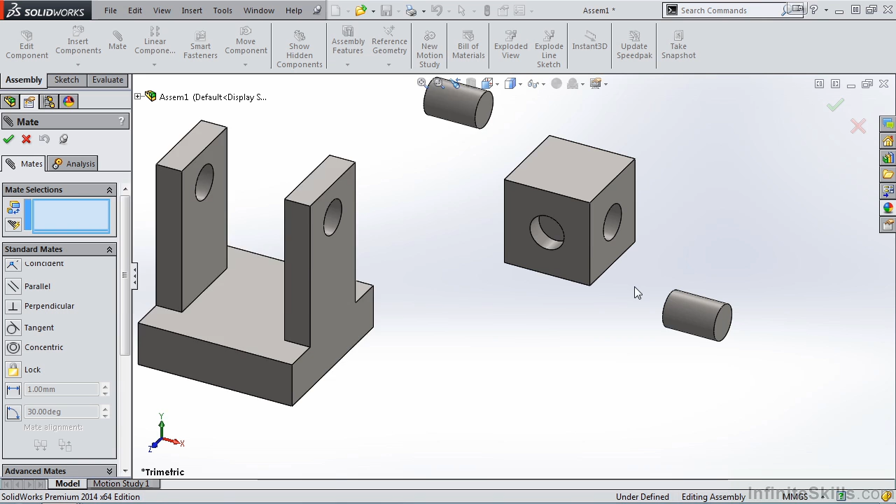Let's say, for example, we would like to mate this pin with this hole in the square block, and we want this face of the pin to be flush with the back face of the hole. So I'm going to select that back face, and notice it appears in the window for the Property Manager. I'll rotate the assembly and select this face. Once I select the two faces, notice in the Property Manager that the coincident mate is the one highlighted.

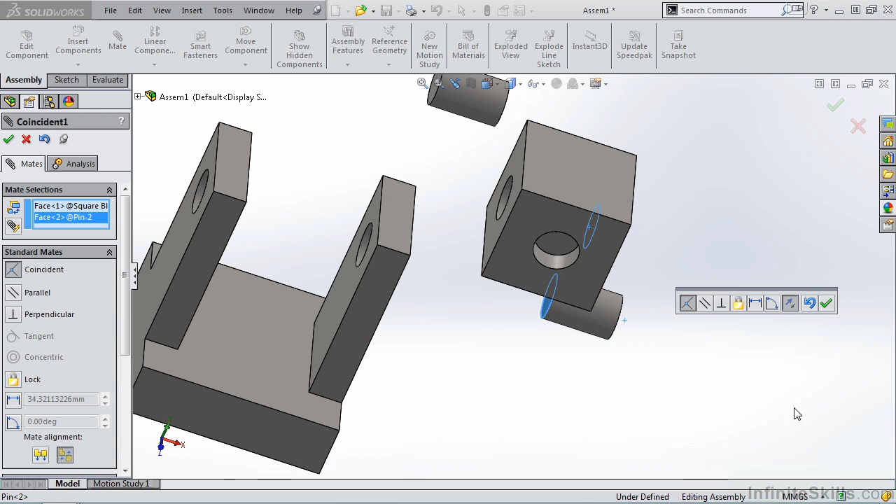Obviously I can select a different one, and I also have a pop-up toolbar, so you don't have to move your mouse all the way across the screen to make changes. I do like the coincident mate, so I'm going to select the green check mark.

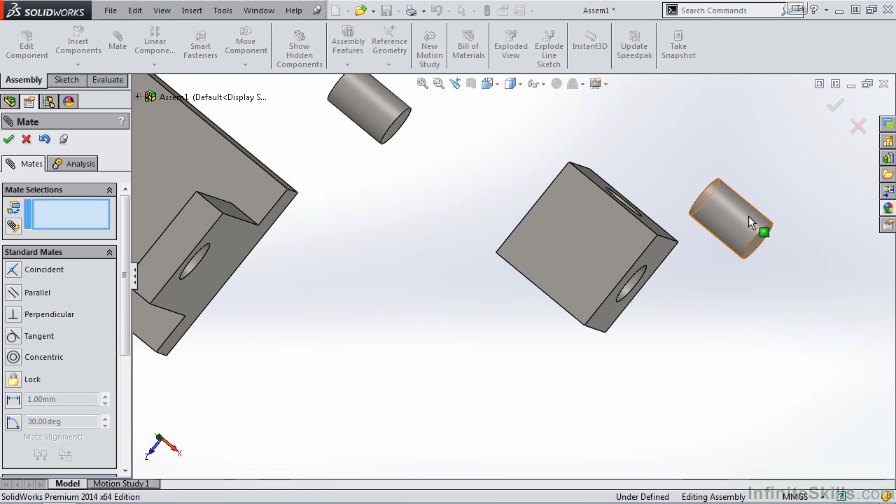Now, as soon as I apply that coincident mate and go to move the pin, notice both parts are moving, and at first it may appear the coincident mate did not take. However, if we look at it from a top view, let's roll it just a little bit more, you will see that the coincident mate did take.

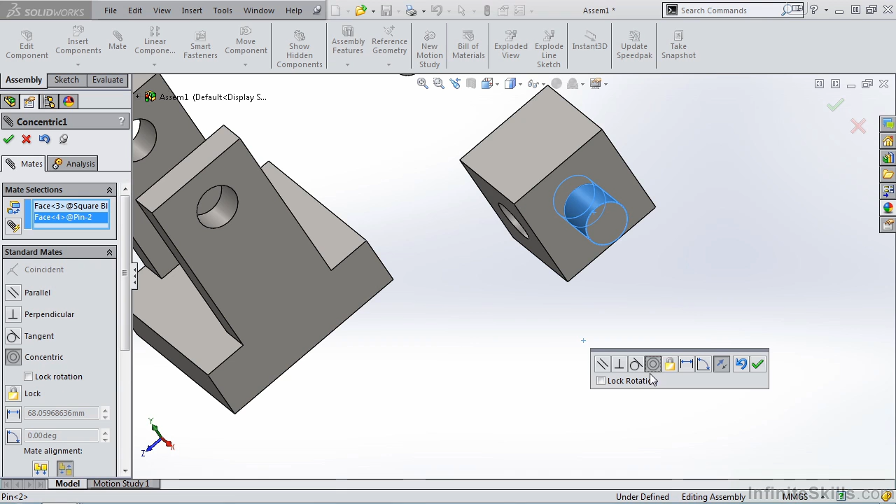However, it looks like we need to add additional mates. Now we'd like to center this pin in this hole feature. Looking at the standard mates, that would be the concentric mate. So I'm going to select the hole in the part, along with the outside of that cylinder. The concentric mate is highlighted, and then I'll select the green check mark. Now, when I go to move the pin, the two parts move together.

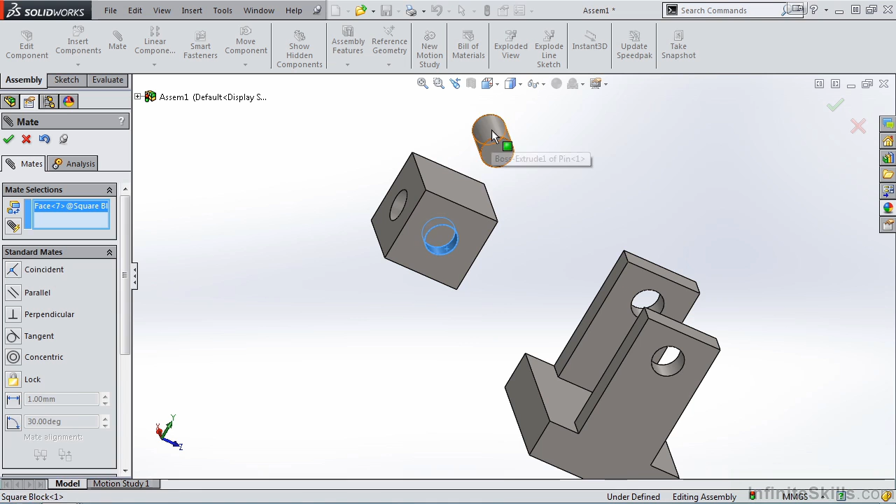Now let's do the same for the second pin. I'll select this face, along with this face, apply the coincident, and then select the surface here along with this surface and apply the concentric. Now notice those three parts move as one.

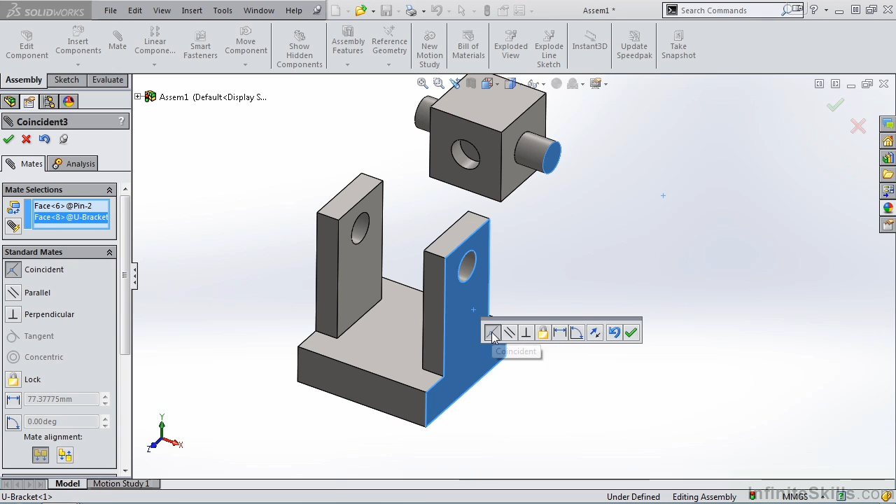Now let's apply a couple more mates to mate these three pieces to the U-bracket. I'll start by selecting this outside face of the pin and the outside face of the U-bracket and applying a coincident mate. I'll then apply a concentric mate and accept it. Notice if I close out of the Mate Property Manager, the block can rotate. Now you may want to have that rotation.

However, if not, you can simply add a mate between this face along with this top face of parallel. Accept it by clicking the green check mark, and now we have a parallel mate between those two faces, and the block no longer rotates.

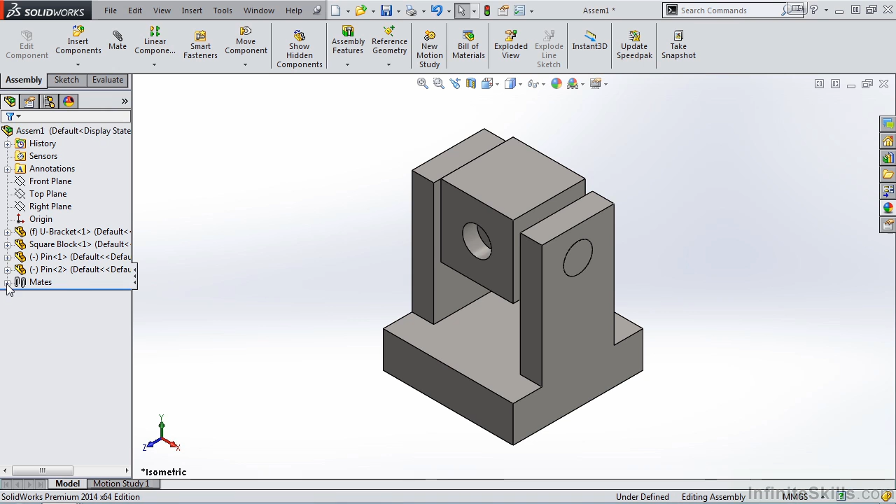Now if I close out of the Mate Property Manager, I do want you to notice that we have a mates listing in the Feature Manager design tree. If we expand it, these are all of the mates we just applied. Now, at a later time, if you would like to be able to rotate this square block, there is no need to delete the parallel mate. You can simply suppress it. Suppressing the parallel mate grays it out in the Feature Manager design tree. When you go back out to the assembly, you'll notice it now rotates.